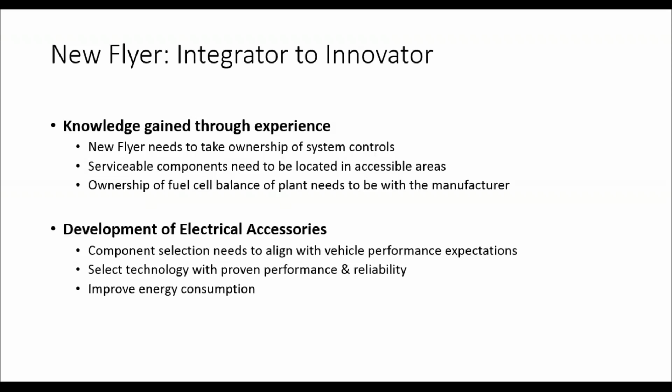So the other part of that was the development of the electric accessories. Some of those accessories back in that time frame weren't necessarily up to the 12-year type expectation that we had for that technology. So we very methodically studied what type of components were needed to make the fuel cell electric bus a 12+ year life product. And so over that course, we've learned a lot about the energy consumption and what it's going to take to make these buses reliable.

When we look back on how we did things in that time frame versus how we're doing now, I'd like to give you a little bit of an update on what has changed in our philosophy. When we deployed buses back in 2010, it was a fuel cell dominant hybrid. In other words, we relied very heavily on a larger sized fuel cell to do the work, and back in that time frame, it was a 150 kilowatt fuel cell. Our new design is essentially to have a smaller fuel cell with a larger battery pack. And again, as I said earlier, we use the fuel cell really as the onboard battery charger.

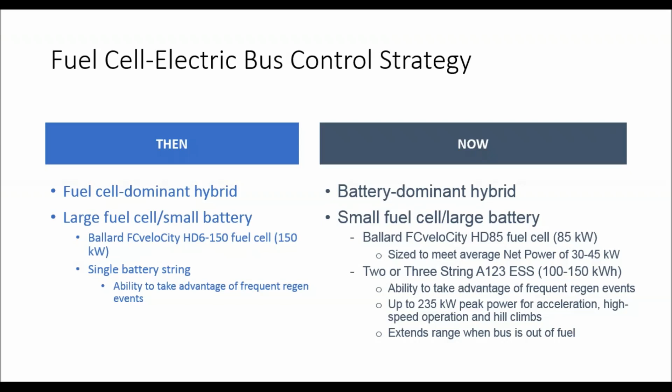So when we had the buses back in 2010, we had just a single battery string. And now on our buses, whether 40 or 60 foot, we have up to 150 kilowatt hours of batteries on board to complement the hydrogen that's on board. So with this, we've seen some strong performance advantages, up to 235 kilowatt peak power, and some very good improvements in the extended range of these buses.

So early in 2019, we introduced our new line of fuel cell electric buses. This product is called the Xcelsior CHARGE H2, and it applies to both the 40-foot and the 60-foot version of these buses. Both buses have been through Altoona. That's public information that can be downloaded from the FTA website. I encourage those interested to do that, and if you have questions about the results of those tests, please contact New Flyer and we'll walk you through how the bus did and what changes have occurred since those tests. But overall, we're very proud of the successful launch of the CHARGE H2.

When we look at the overall status of where we are in the deployment of fuel cell electric buses, we'll start with what's in development and production builds. We are working with multiple fuel cell suppliers. Hydrogenics and their Celerity is a project that we have on our 40-foot bus. This is a project that was funded in part by the California Energy Commission. It will be delivered to Sunline Transit by the end of this month.

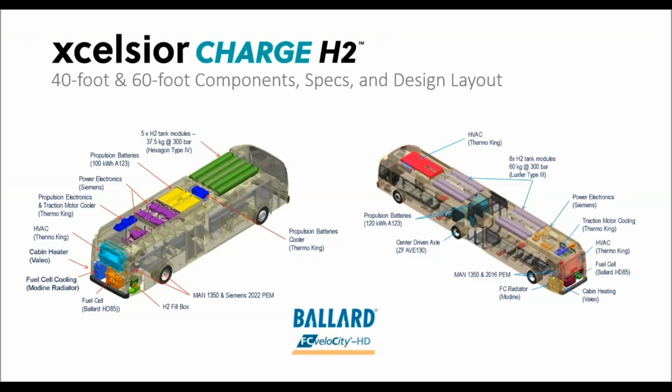So as far as hydrogen, a 40-foot bus would have 38 kilograms of hydrogen, and then on a 60-foot bus, up to 60 kilograms of hydrogen.

Okay, my apology there. My screen went blank, and it is now back.

And the other thing I want to point out is, compared to a long-range battery electric bus, these fuel cell electric buses can be up to 1,200 pounds lighter weight because of the energy density of the hydrogen versus the batteries. So that's another strong advantage to this type of technology. So that bus is currently in the hands of AC Transit, and they will demonstrate it in service for a 2-year period.

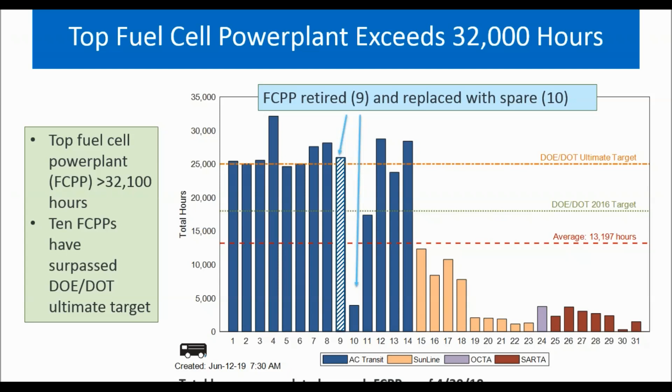They're newer buses, so those hours are lower, but AC Transit has achieved some amazing results with their buses. We've got a bus that's over 32,000 hours. Sal can talk more about that when he gets to his presentation. But this is really nice because we see 10 fuel cell power plants have surpassed the ultimate target, and the idea was to get it through about half of the bus life. So we know that these power plants can do what they were designed to do.

Another reliability measure is miles between road call. And this chart shows the DOE and FTA targets for 2 different metrics. One is the miles between road call for all bus road calls, and that's the lighter blue line at the bottom. And if you look at the green line at the top, that would be if you looked at road calls that were only due to the fuel cell system itself, and that would include the fuel cell stack and the balance of plant components. And so this tracks the cumulative miles between road call over time.

So you can see that for the bus miles between road call, they surpassed that ultimate target back in 2015, and it stayed pretty steady above that target of 4,000 miles between road call.

For the fuel cell system, it's had some ups and downs. Part of that is due to lower mileage. In the beginning, there were only a few buses in service, and then we've added them in as they've been put into service by the different agencies. And so with the lower miles, sometimes a road call can cause that dip. But you can see it's been pretty consistent between the interim target and the ultimate target, and we expect that to rise over time and settle out.

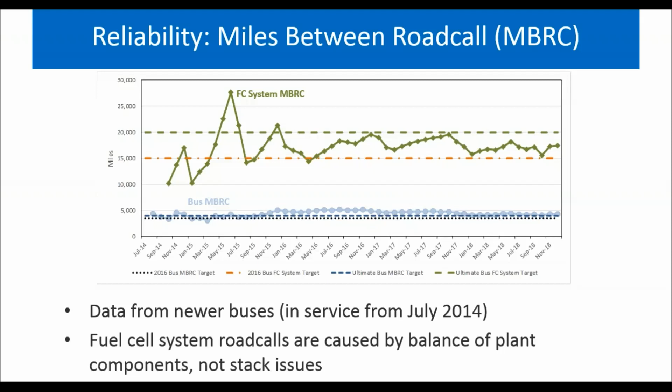Most of the fuel cell system problems, actually all of them, have been caused by balance of plant components. We have not seen any stack issues. One of the things that's a big challenge for transit agencies is the cost of hydrogen. DOE has set a target of $4 per kilogram. We have not seen that yet, although some of the data fluctuates, so we can see that for some monthly data. What I have here is looking at each of the transit agencies and the data that they give us.

And so each column is the data for that particular period. And then we've got the average cost per kilogram during that period, the maximum cost by month, and then the minimum cost per month. So you can see that there is some fluctuation. One thing to note is that the data provided isn't exactly equal comparisons for Sunline. It's their older station. They own and operate that station, so it includes O&M cost. AC Transit and SARTA are delivered costs.

And then for OCTA, unfortunately, during this early first demonstration, they did not have a station. They're in the process of building the station, so they've been forced to go to local retail stations, which is showing you that's definitely not the way to go, because the retail stations have much higher cost. But if you look at the blue rows, that's for the fuel cells and the hydrogen cost. And then the orange would be the equivalent baseline technology cost.

And if you look at the rows that are outlined in red, that's the primary comparison between the cost per mile for hydrogen for the buses in that particular fleet compared to their cost per mile for their baseline bus. So you can see that right now with the cost of hydrogen, it's still more expensive per mile to operate fuel cell buses.

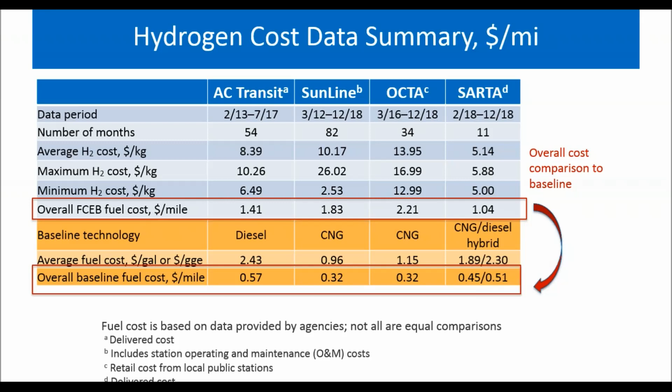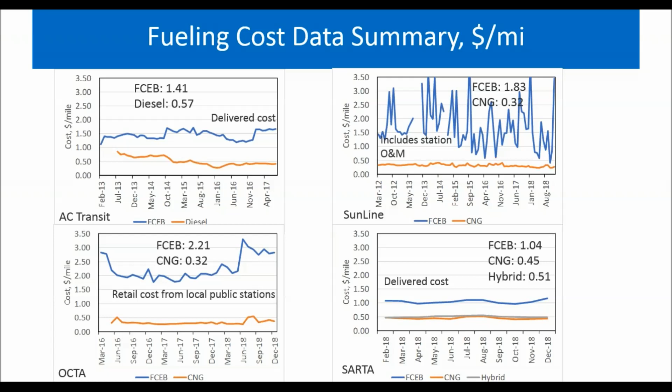So this chart shows a chart for each of those agencies, and it's the monthly cost per mile for hydrogen in blue and for the baseline in orange or gray. SARTA has hybrids also, so we've tracked that separately. So the low cost for diesel and CNG fuel certainly makes that lower. But this really shows you how you can get some serious fluctuation if you're including the O&M. That's why Sunline's cost goes up and down. If they have a maintenance event and they don't have much hydrogen dispensed, that causes that cost to go way up, whereas your delivered cost is much more stable over time.

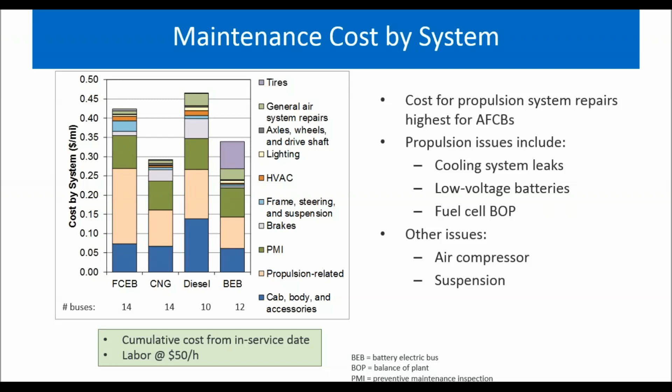This chart shows the maintenance cost trends for a number of the fleets that we've been working with. So the dark blue line would be the cumulative cost per mile for the fuel cell electric buses. And then we've got two different CNG bus fleets. One was a 2008 model year, and the other one was a 2016 model year, and then a diesel fleet that we've followed for a number of years. And then I've included that battery electric bus fleet since we've got multiple years.

And since we didn't operate these at the same time, we've basically set them all as start of service and into months. So that would go out through 75 months for the one fleet. So we have a couple stages to look at. If you look at the fuel cell electric buses in stage 1, you've got very low miles. It's an introduction of a new technology. So we see some higher costs in the beginning as the transit agency is sort of coming up to speed.

Then when you get to stage 2, it levels out. The miles are increasing. Most of the repairs are still handled under warranty. And then stage 3, you see some climb with the learning curve for troubleshooting as the agency's taking on more of the repair and those buses are maybe running out of warranty. You look at the CNGs and the diesels, that's kind of what you expect to see for a commercial technology. Low in the beginning and then just a gradual increase with time as the buses age.

Now, for comparison, the electric bus fleet in the green, you can see at the beginning, stage 4, they're very low maintenance cost. At that point, there were OEM staff on site doing all of the major repairs, and so the costs are really low. And then over time, we've seen that cost climb as the agency takes over and the warranty period ends. We've seen some fairly high cost to parts that have caused that number to go up.

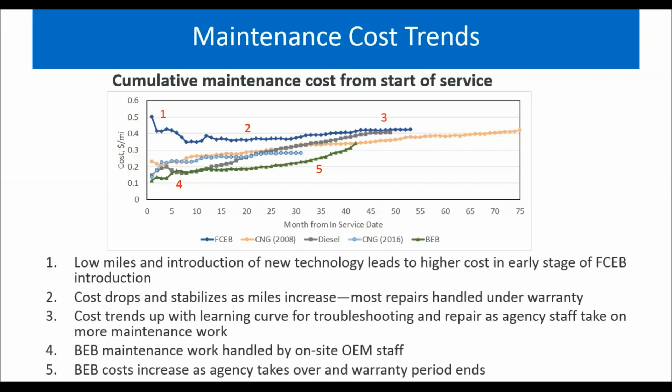So what are the technical issues that are affecting costs for the fuel cell electric buses? I mentioned balance of plant components on the fuel cell, things part of the air handling or the cooling, blowers, compressors, controllers, pumps and plumbing issues have been some other problems. For the electrical system, a lot of problems involve the low voltage batteries. When you have all this IT equipment, cameras, fare boxes, radios, it all wants to drain that battery and shortens that battery life. This also affects the battery electric buses and was part of the reason for the climb in cost in the fleet that you saw in the chart before.

Some cooling system leaks, depending on where the agencies operate them, are difficult to locate because of a hotter climate. SunLine doesn't see pooling, so it's hard to find a cooling system leak sometimes. I mentioned the bus air compressor. While it's a bus component, because it's electrically driven, it's more expensive than the standard bus compressors. And then, of course, added hours for troubleshooting problems. I expect those to drop with time and familiarity of the technology.

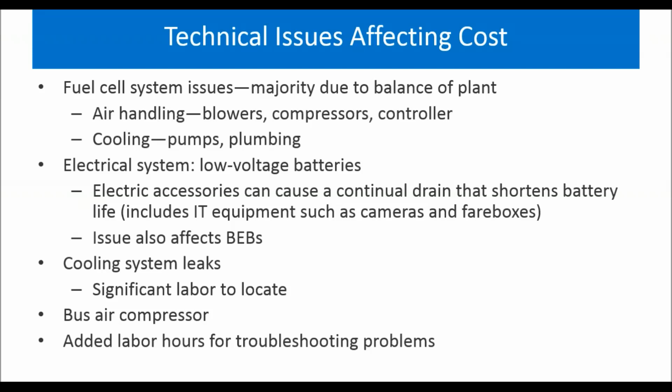The remaining challenges and barriers for industry to fully commercialize fuel cell electric buses. David mentioned larger fleets. We know those costs will come down with higher volumes. In some cases, agencies could combine orders to get more buses in a specific order, which would be very helpful, and a larger fleet can also help a transit agency accelerate that learning curve for their staff. It's easier, I think, to train for more than one bus in a fleet. Sometimes it's a challenge to have a 1 bus or a 2 bus fleet when you've got a large fleet.

Incorporating training for fuel cell electric buses into standard maintenance training, we're seeing that happen now, and I think that's going to definitely help moving forward. Then we mentioned the cost of hydrogen. Installing a hydrogen station is really difficult because it's a really large upfront cost, but it's easier to scale up compared to a battery electric fleet. There are some things that transit agencies could do, such as a turnkey station where the fuel provider owns and operates. That can help stabilize cost. Also, long-term fuel contracts, such as what you have for diesel or CNG. And then station utilization. The higher volumes could mean a lower per unit cost.

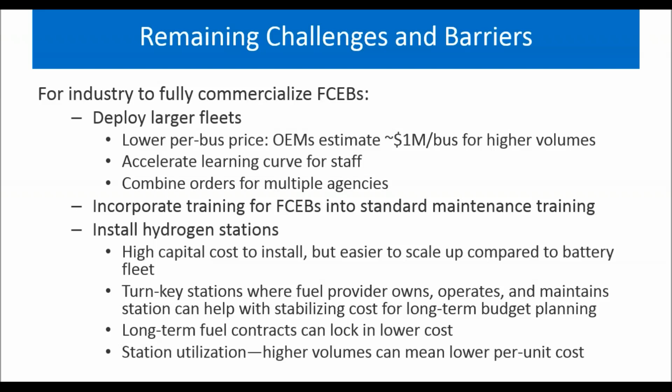And that was the end of my presentation. There's a lot more data that we have in our reports, but I tried to limit it to some snippets that I thought might be of most interest. I look forward to questions at the end.

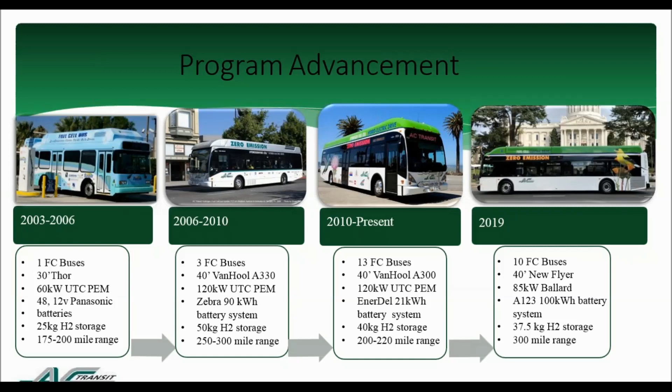All of these buses fuel in about 6 minutes. We can fuel a fuel cell bus in basically the same time it takes us to fuel a diesel bus. We're moving on to a couple of other things. As David described, we've got the 60-foot fuel cell bus that's coming to us. We're getting 5 of the Xcelsior battery-only buses, battery electric buses.

And so we're going to be able to run comparisons between the fuel cell electric buses and the battery electric buses. We've also got Xcelsiors in diesel and diesel hybrid. So we'll be able to come up with some good numbers. CTE and NREL are going to run much of the analysis on that. Now, let me turn it over to Sal to talk about how that fleet has worked and the training program that he's put together.

Thank you, Director Peoples. So Leslie talked a little bit about this. The Federal Transit Administration and the Department of Energy established performance targets for the fuel cell electric bus technology to be able to assess the commercial viability. And one of the things that was very important for AC Transit is to be able to challenge the technology to that level.

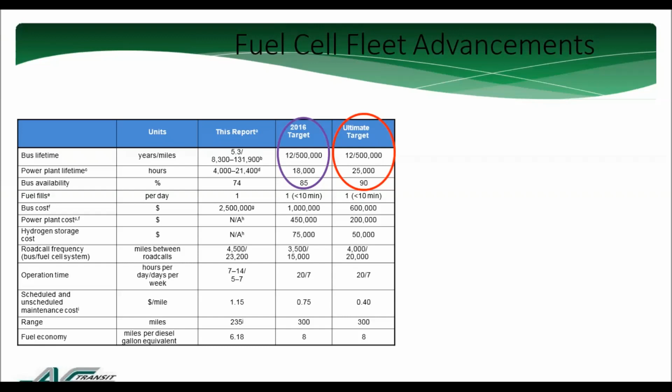And we made a commitment early on in 2013 that we were going to start running these buses like any other public transit bus and put them up against our diesel buses, and seeing how they're going to perform was going to be the only way that we're going to be able to try and reach these targets. So if we click on the slide, we can see some of the advancements that we were able to accomplish. We're really proud to say that 5 of the fuel cells met the target in 2016, which is the 18,000 hours of operation.

The bus availability also ranged very equivalent to the diesel buses. And by October of 2016, 11 of the fuel cells achieved the target by 2017. And then once we did that, we wanted to, in a rapid pace, go after the ultimate target, not knowing if we're going to ever achieve that, because as Leslie mentioned earlier, the engineers of the fuel cells only guaranteed the fuel cell for no more than 3,000 hours of operation. They didn't expect it to last more than 4,000.

So here we are surpassing 18,000 hours, and we're just wondering what's going to be next. So fuel cell 7, which is one of the original fuel cells, reached 25,000 hours in June of 2017, and ultimately reached more than 32,000 hours of operation. We retired that fuel cell literally about a month ago because it was still producing energy, just not enough to keep the bus running the full route.

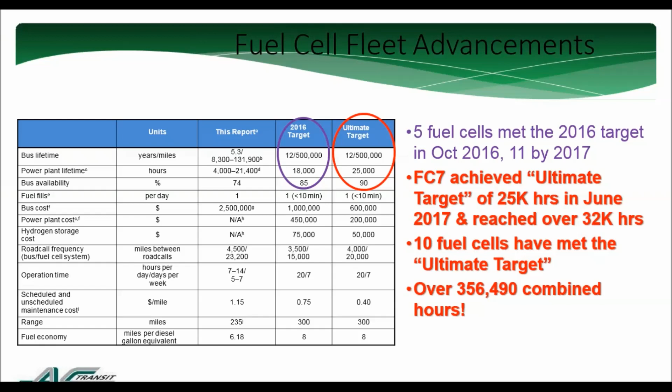So now we already have established what looks like the end of life for a fuel cell, and we have a report that we're creating internally to see what those metrics look like. But we're proud to say that 10 of the fuel cells have met the ultimate target already, and collectively combined between the earlier deployment and existing deployment, we have over 356,000 hours of fuel cell operation. And we have more than 3.2 million miles of clean zero emission public transit that we have deployed.

So moving on, in November of 2017, we engaged with the Center for Transportation and the Environment, with CTE, because we wanted to really get an understanding of what the zero emission bus technology can do and how it would fit into AC Transit's route profiles. So we commissioned them for a study, and the essential component of the study was we took all of our routes, all of our blocks,

and we broke them apart into 3 different categories: a flat route, more of a local service; a hilly route, since we have some high hills, as Director Peoples mentioned, here in the East Bay area; and then our Trans-Bay route that is mainly for the commuter service. And then we took that and we modeled that into the different sizes of buses that we have. So as you look at this chart, you're seeing on the left the size, the length of the bus.

Then we also try to simulate using some software on what would be the beginning of life range for the batteries and the end of life range using a strenuous operation and a nominal operation. So one would be ideal conditions, the nominal, meaning the operator is perfect, drives the vehicle perfectly on a very flat surface, and the bus really doesn't have a lot of heavy capacity loads. Then strenuous would be the fully loaded bus going on the hills on a hot day with all the components running. And that gave us an idea of how the vehicles will perform.

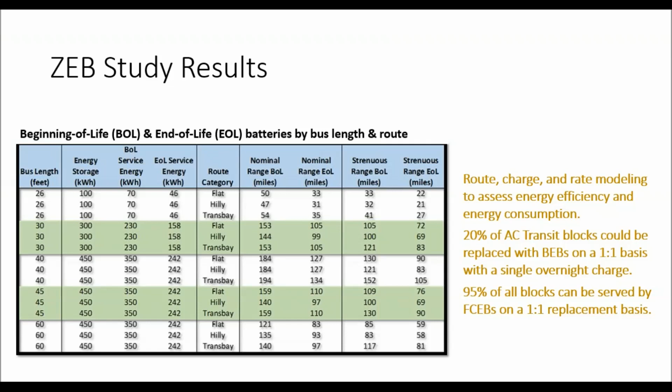And what we learned from that is we wanted to match that up on a 1-for-1 basis with just doing what we do today, which is we fuel our vehicles at our depot. So we would charge our vehicles at a depot. And the results that we discovered was 20% of AC Transit's blocks could be served by a battery electric bus on a 1-for-1 basis with a single overnight charge. And 95% of all our blocks can be served by a fuel cell electric bus on a 1-for-1 replacement by fueling the bus one time.

So now that we established that we can deploy the fleet and the fleet can meet our route profiles and can serve our customers, we realized that there isn't a readily available pool of highly trained mechanics that know how to operate and maintain a hydrogen fuel cell bus. So we had to challenge ourselves to start to develop that training. And we broke down our training program into hydrogen fuel cell safety and familiarization. We wanted to make sure that our technicians and mechanics understood the do's and don'ts. And then we got a little bit more specific on the lithium-ion battery safety, fuel cell power plant, and then we have the Siemens drive system.

So once we did that, we started training. All the mechanics have been trained and have to go through this basic safety training program. When the mechanics were going back to the divisions and working in the shops, since we only have 13 buses, they were not exposed to the bus very frequently, which is a good thing, but it's not a good thing when we're trying to gain experience and practice what they learn. So we realized that, and this actually came from our mechanics.

We have trained 343 mechanics that have attended zero-emission bus training, and we provided over 16,560 hours. And the other thing that we also do is every single operator is trained on the zero-emission bus. And this concludes our presentation.